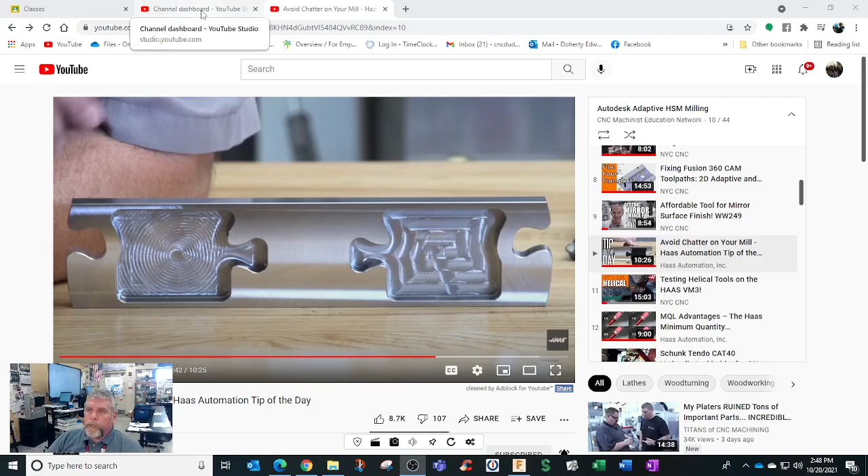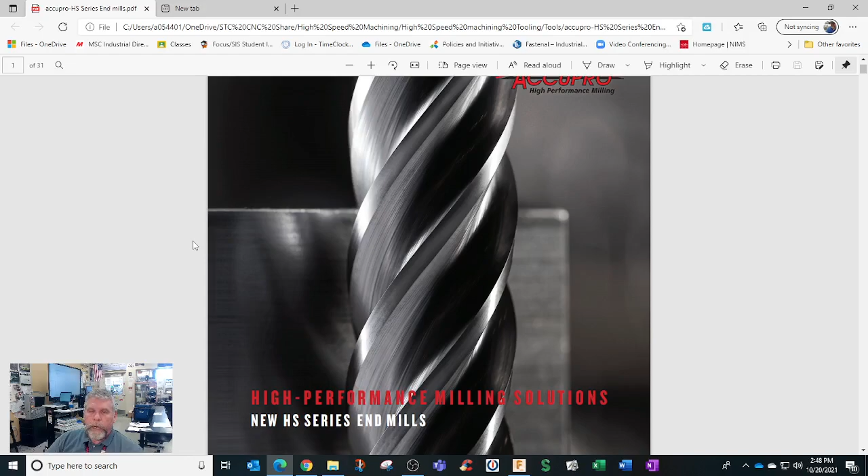All right, so what are some other things I have here? I'm not promoting any particular end mill brand. They all make pretty good end mills: AccuPro, Helical, Kennametal, Zombie Mill, all that stuff. So this is from our supplier, AccuPro. I saw this HS series, so I had to do some homework when we got into milling steels. We took some projects like Titan projects and converted them to steel cutting, and we also did some pre-programming for other metals, even though we may not have that metal.

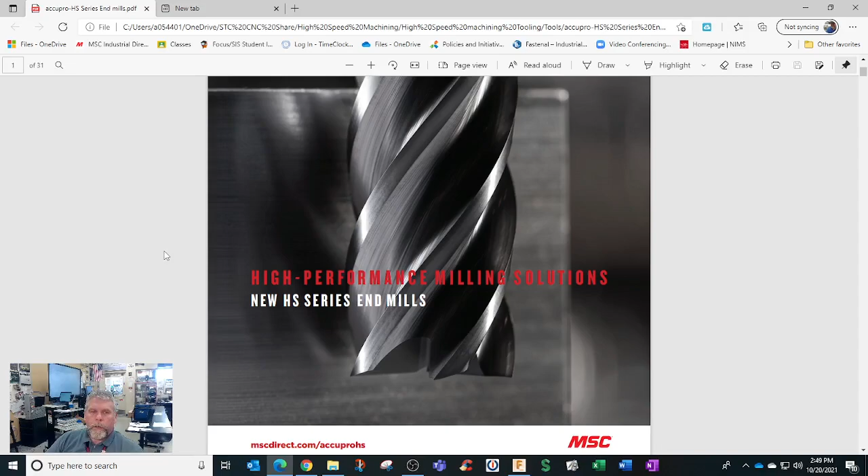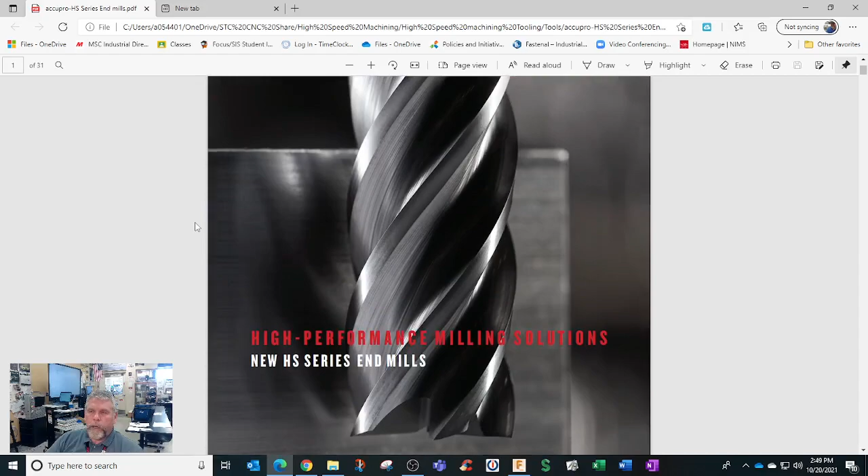And what kind of tools do we use? We have to make a little bit of adjustment on tools. The face mill that we use in our shop, the insert is capable of cutting different metals, so we leave that alone. For the end mills, we've decided to go to a 4 or 5 flute variable helix end mill. That's the style of end mill that's used for high speed or high efficiency machining processes.

A couple of things you really need: the tool is trying to yank itself out. We're trying to cut at full depth, so you've got to have a lot of grip. You can use a side lock, really a standard holder. If the end mill has flats on it, that's effective. The typical ER collet, if it's not torqued correctly, may not work. The end mill still may pull out.

They make some milling chucks that actually have a lot more clamping force. In our case, we're using a Lyndex SK16 collet system, and they recommend a torque wrench, so we have a torque wrench for that. We also bought some better caps for our ER32 system. We're torquing those also, and we've been really successful with those. You can see some videos on really high speed, like running 100 to 200 inches a minute in your steels. So we took some data here and experimented with some.

But we wanted to get the right tools. We got this HS series, and my thought was 3 flute tools are usually your aluminum tools, a lot of space. It could be uncoated or a coating that's agreeable with aluminum. But more flutes make the core stronger. 4, 5, and even 7 flutes are actually pretty effective. But how do you get them to rough? Like this is a 7 fluter here.

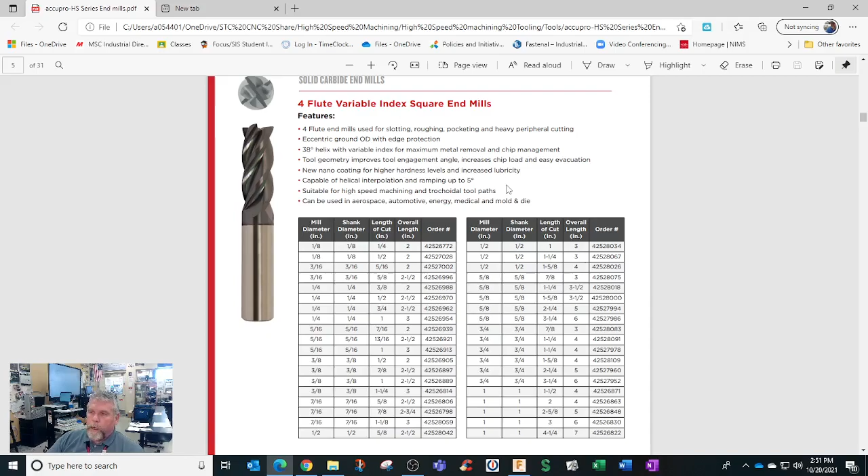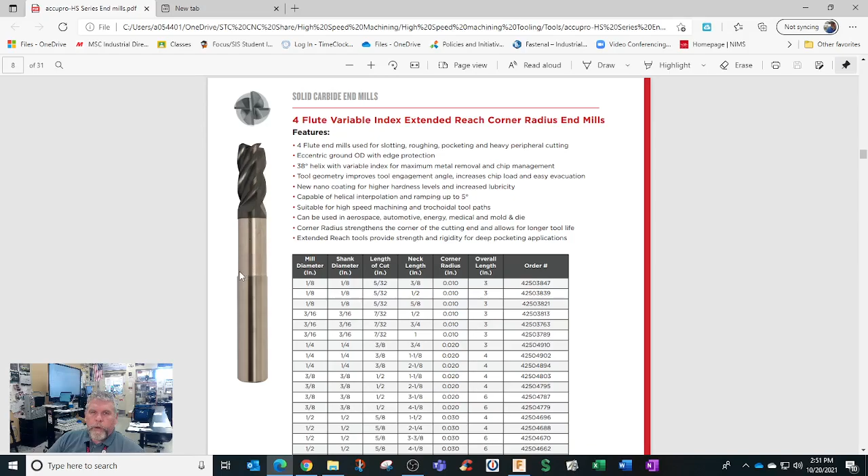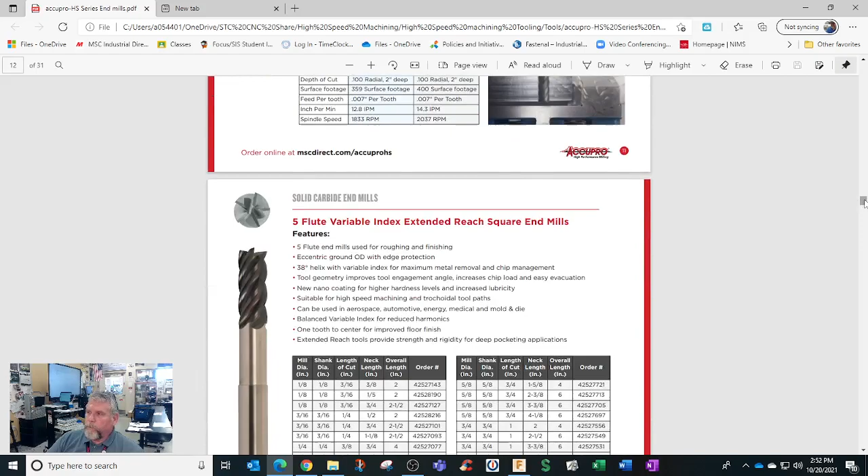You get your typical ball end mill, a corner radius or bull end mill, ones with necks on them, they're reduced. We used to have to make these; you go to our grinder and grind a neck on there. This one's for chip breaking with little notches in it. And your typical finishing flat bottom end mill. So at the very bottom of this catalog, you should be up to date on your feeds and speeds.

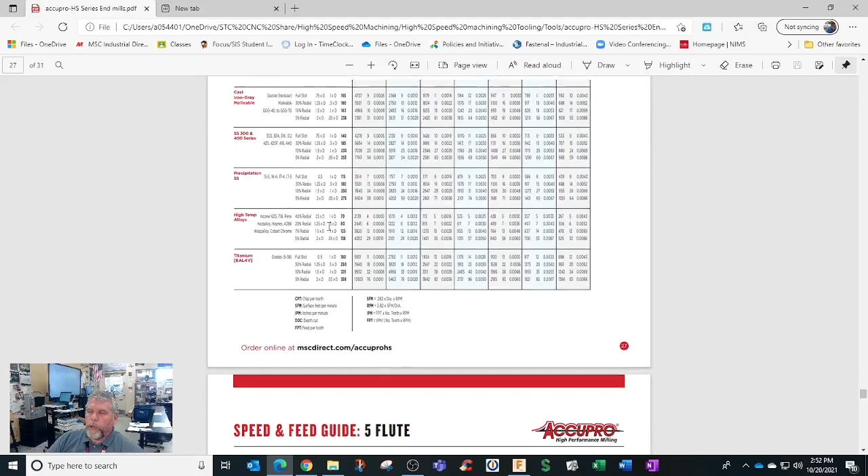Typically we're using a standard feed and speed chart, but we actually learned a lot on this, because if we use the 4 flute version on Titan 1M, where we're using a 3/8 end mill, and we're doing 1018 carbon steel right here, are we going to be full slotting, 30% radial, 10% or 5%? On the left here is surface feet per minute. This range is a little bit more expanded than normal, and you can get the reasons why later on.

But right over here, they actually gave you hard RPMs. Usually we're calculating. So we'll probably go with 30% or less on the radial. But they say this looks like it can do it. And if you have a low horsepower machine, the less radial cut will actually still work. So if you did 10% radial, that'd probably be pretty safe.

And then they have some recommendations. Axial depth of cut is how deep we're going. So in this case, if we're 30%, we can go 1.25 diameter deep. So with a 3/8 diameter, we can go 1/2 inch deep. So in this case, 1.5 diameter would be probably a safer bet.

We can go 10 or 15% on the radial, or the optimal load in Fusion 360. And radial depth of cut is really 10% of the diameter. That's what they're implying. So in this case, we would run this RPM right there, 3,496 at 40 inches a minute for steel. And then you get into your other metals.

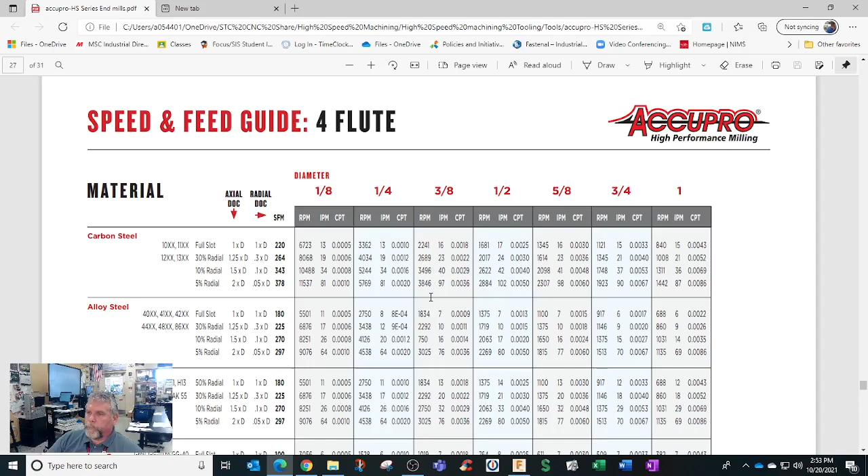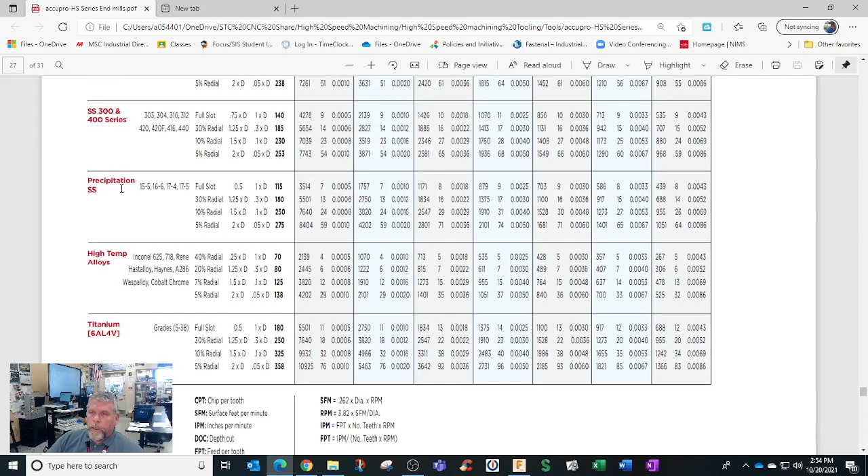You got alloys with the 4000 series, tool steels that are not hardened, cast irons, stainlesses, very difficult metals to machine. These are 2 stainless series. Then you get into your high temp nickel alloy stuff, Inconel, Hastelloy, Waspaloy, cobalt chrome.

I have a cobalt chrome knee, so it's part cobalt chrome and part titanium.

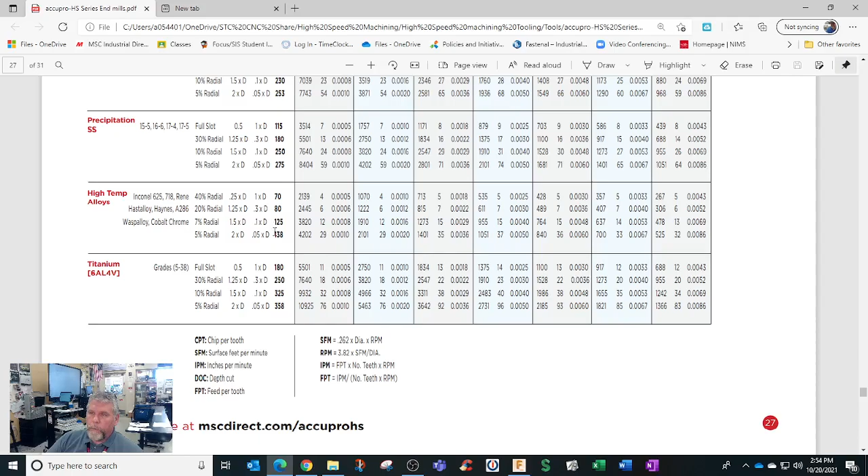And titanium. So actually the high temp alloys are the slowest RPM of all these. So if you look at the SFM numbers, that relates directly to RPM. Chip per tooth is how much each tooth can cut, and that's always in thousandths, small numbers. Surface feet per minute is how you calculate RPM.

So if your tool manufacturer says, I want you to run it at 200 to 400 surface feet per minute, that's your range. And you do a simple calculation to create RPM. In a milling machine, you got to have RPM, revolutions per minute, and it has to feed in inches per minute. So it is a terminology, and you even have the formula right here. RPM equals 3.82 times the surface feet per minute divided by diameter. So that's actually how it's calculated.

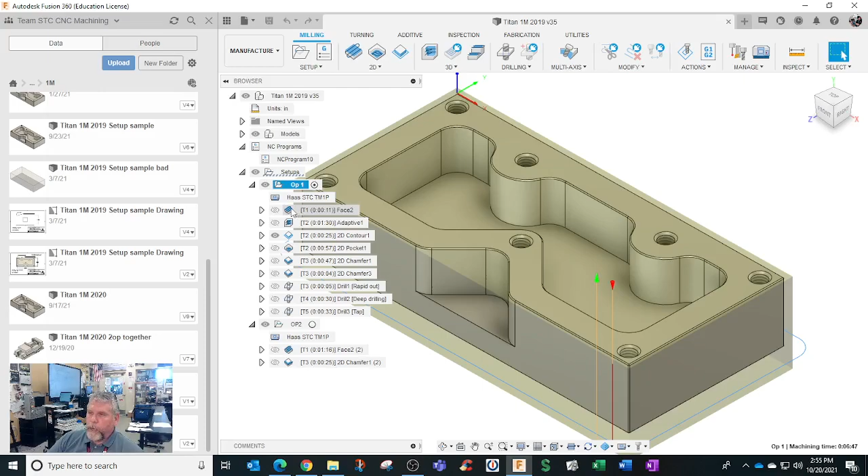Now, if you're in Fusion, it's self-calculating. All these CAD/CAM systems do that. I'll pull up a Mastercam one to do the same demo later. So in this one, I actually made my own tool library because I plugged in all my feeds that I need according to that chart I use. And I've already made parts with it.

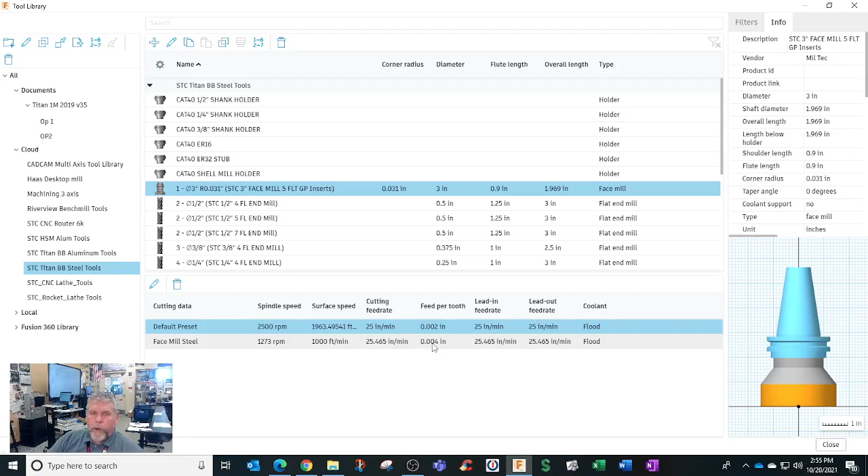So in my tool library, in my cloud, I have Titan building block steel. These have all been preset with the RPMs needed. So this one, we have tool cutting data down here, face mill steel. And that's 1,273 RPM at 25 inches a minute, which equates to 4 thousandths per tooth.

Now our Titan, if you use the 4 flute end mill, I have adaptive 10%. I have it all set up right here. So that would be my selection, which really is about 3,500 RPM at 40.5 inches a minute. And it's also going to set my optimal load at 10%. So it'll be like 0.0375 on the sideways cuts.

So I'm going to upgrade this one right here. I'm going to save as a new part. 21, oops, steel. And I like to say real machinists cut steel, so.

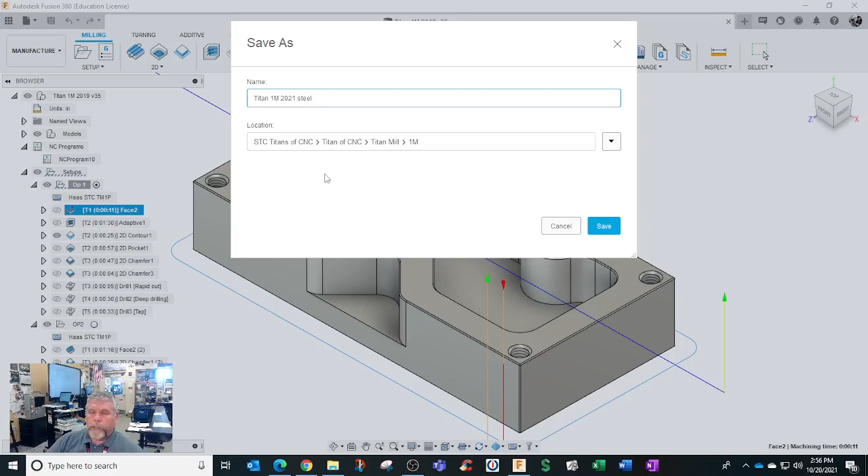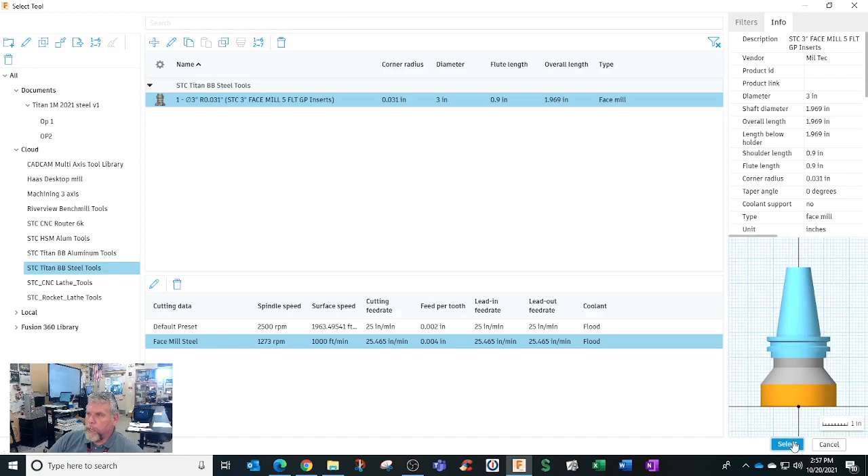Okay, we're gonna upgrade. Edit. And we're gonna select tools from the new library, steel tools. And here I can even just narrow everything down over here. Face mill, we only have one. Face mill steel. I've already pre-selected the RPMs. And other than that, I'm not going to change anything. Everything is ready to go.

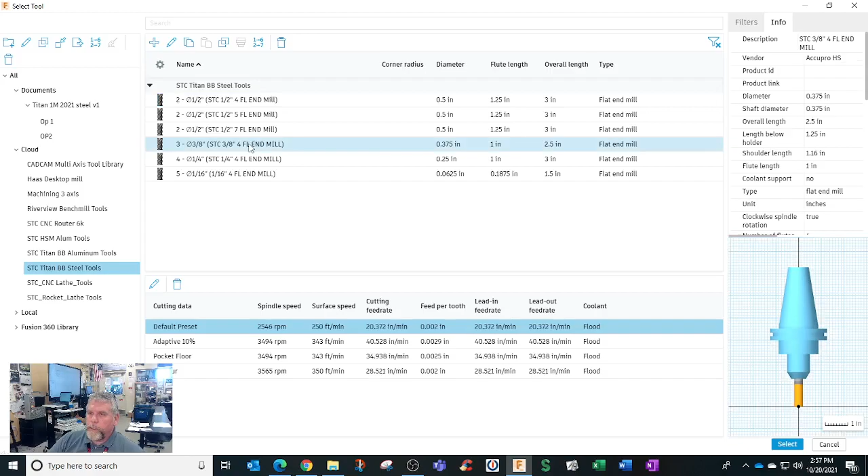All right, I got to go all the way down the list here. I got to go edit. I'm going to select the 3/8 tool, but I'm going to use the 4 fluter. So I'll do flat end mills. I'm going to use 4 flute. Oh, wrong selection. 4 flute by 3/8. I'm going to click adaptive 10% because that's the style of machining. And that presets all my feeds and speeds and also presets this optimal load number right here.

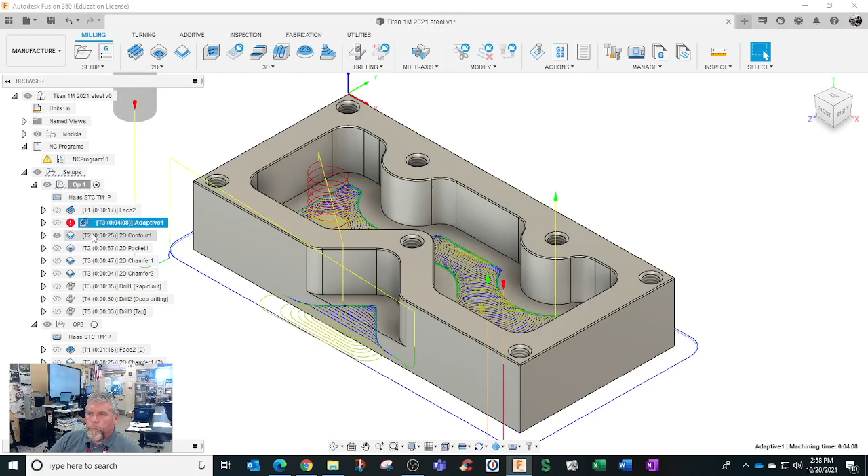But it's all the same parameters, stock to leave and stuff like that. All right. Now if I put the eyeball on, let it calculate, we should get an updated one. All right, yeah, there it is right there. You notice these cuts are very close together. That's the optimal load setting.

All right. So now we're going to go contouring. So then we just got to go update all the tools. Once you've already selected a tool in Fusion, you don't really need to go back to the cloud. You just go to your operation, because now we're actually getting different tools in here.

So if I go to operation 1, I got the 3/8 end mill, and I have the old one. I have 4 flute and 3 flute. This is the one I want. And this is going to be my contour. So I'm going to reselect that one and hit OK. And I have 2D pocket. And that one is also the 3/8 tool.

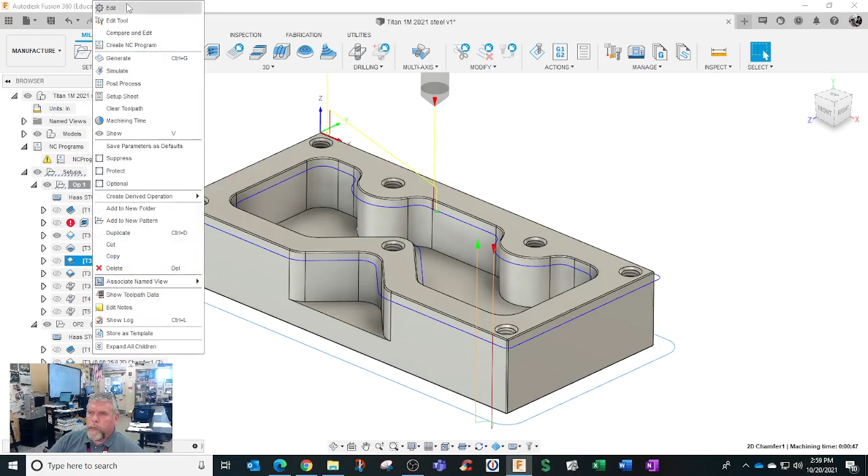So I've got to go reselect the tool, go to my operation 1, select the 4 fluter, and that's pocket, floor, select. Done. Hit OK. 2D chamfer mill. Let's go to edit, select. This one I'm going to have to go to the steel library, pick the, was it 1/4 inch chamfer mill, I think, and select chamfer, select, OK, edit, and yep. I've got to just select the new one, operation 1.

I have 2 competing tools, and I probably should relabel these. I've got Chamfer Mill 6000 and Chamfer Mill 53. So this is a case where I need to label this better. I'm going to pick chamfer on this one for the updated feeds and speeds for the 1018 steel. Hit OK. And I have drills.

Now the drill, so we're going to use the same chamfering mill. Change the end mill, and we're going to use a different drill and a different tap. The aluminum parts are using a forming tap, or what they call a roll tap. Sometimes we're not successful with using roll taps in steels, so we're going to use a proven formula. We're going to use traditional cutting taps. We're going to use a screw, or what we call a spiral fluted tap, so we'll pull the chips out because they're blind holes, and that requires us to use a different drill size.

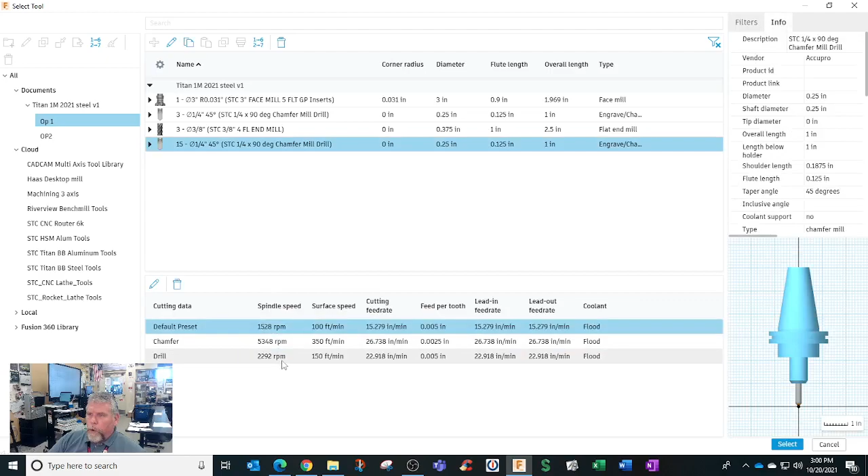So let's go reselect the spotting drill, which is the chamfer mill drill. I'm going to go to operation 1, and by default Fusion tries to pick hole making tools for holes, but we're actually reusing a milling tool, and we're going to pick the lower RPM drill feature for speeds and feeds. And another trick here is, yeah, everything's all set to go, chamfer diameter. Now we're going to change our drill and tap and change the feeds and speeds for that one.

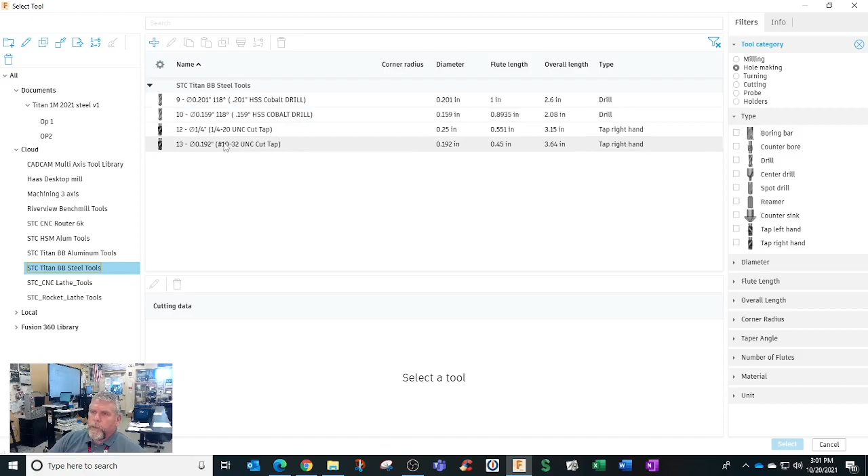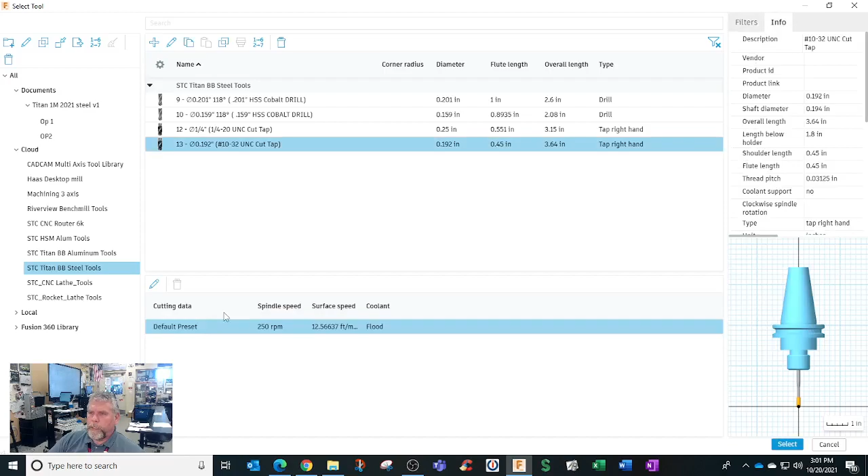Let's select that one, go to steel tools, we're in hole making, and right here we're doing a 10-32 tap, which requires a .159 drill, not the .177 that we normally use for the forming tap. Let's select that one, hit OK, and then drill and tap, final, edit, select, and steel tools, and we're going to pick the 10-32 cut tap. And this has a 250 RPM. And yep, hit OK. That's the correct feeds and speeds. So let me just do a quick regeneration. All right, make sure everything's updated. And we'll do a quick simulation.

So feeds and speeds are a very deep subject, but you want to take this a little bit at a time. So if you mastered the aluminum parts, now where do we go from here? Let's try various steels. 1018 is actually considered to be a low carbon steel. It's probably one of the softer steels, but definitely different feeds and speeds. So real men cut steel.

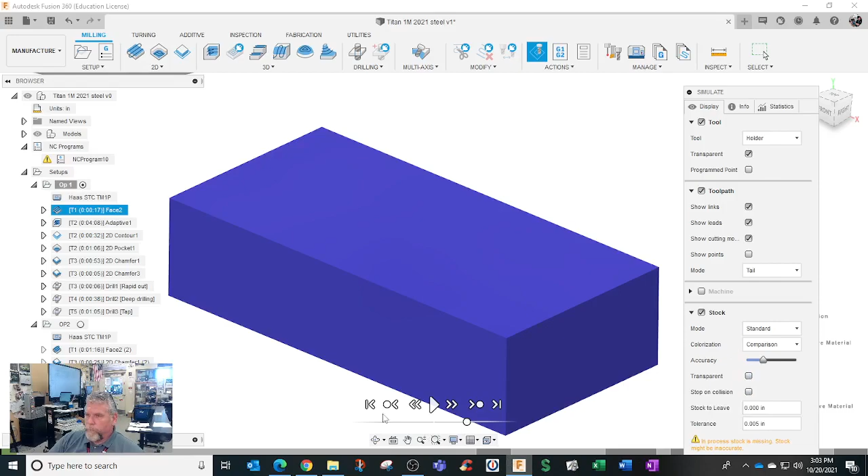Let's renumber the tools. So we're on operation 1. Going to renumber the tools and put them in order of operation numbers, and it'll line up with our tool list. Yep, that's done. And I'm going to do a quick simulate just to make sure everything still looks good. All right, I'm going to turn this new machine simulation off, and I use the comparison view because blue is big, red is bad, red is dead, and green is good. All right, slow it down and hit play. All right, green is good.

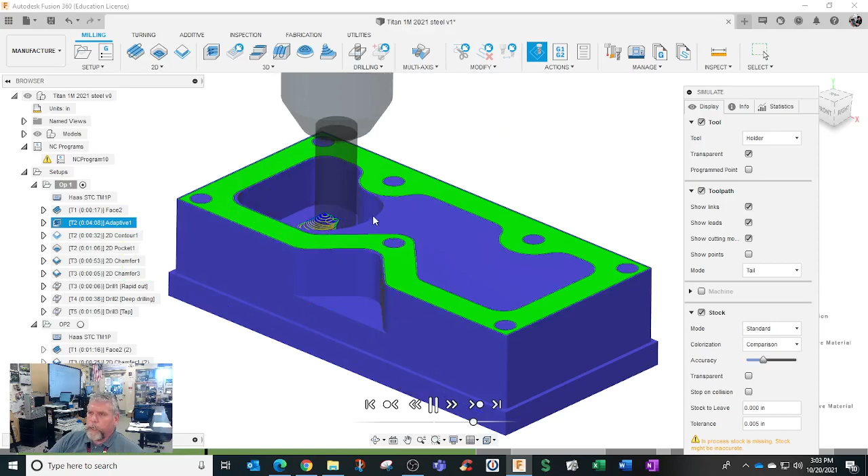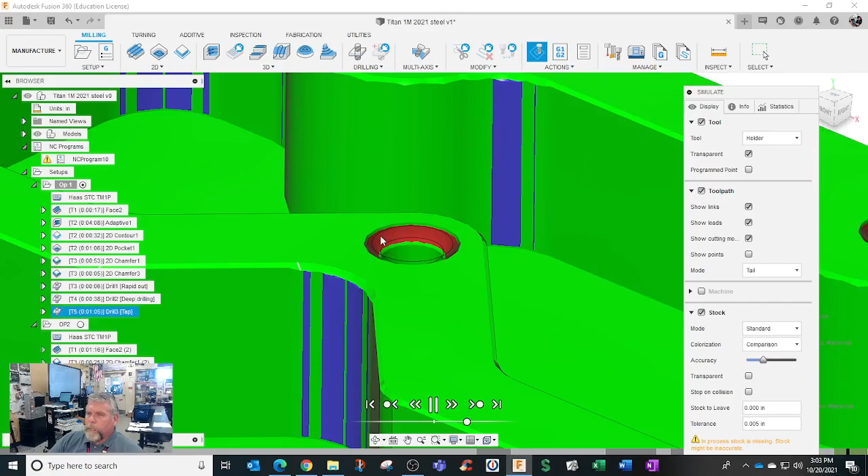All right, doing a roughing strategy just like we have before. Not much to see on the outside. Only take smaller cuts sideways. That's pretty much the only difference here. All right, then let's slow it down for all the others. So our chamfering left a little red mark there, probably because we're going bigger than the diameter. Let me just make sure that's correct, and that would be the first drilling operation. So if I look at it, it actually looks bigger than the diameter.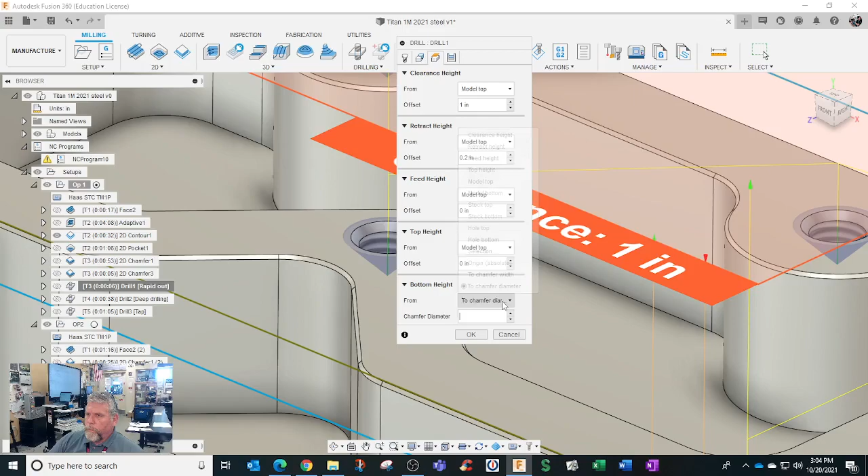So let's go see if we can do a quick fix here. What's our height? It says chamfer diameter, and it's forcing it to a certain number. So I'm going to just shut that off, and I'm going to go to chamfer width. And I found lately that's a better selection. That lines up with the hole size.

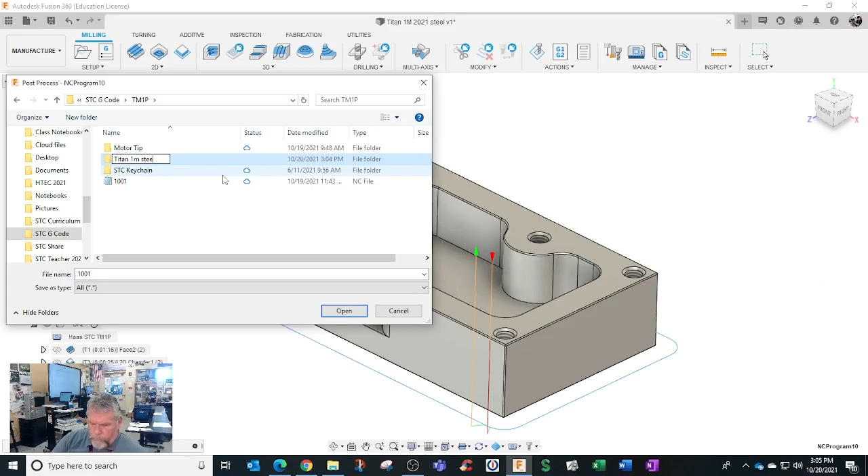All right, now we're going to post our code. Now in the new NC program setup, I see one here already, but if you press this, it says NC code out of date. So hopefully we can repost from this side. Hit post. I'm going to save it in my temporary file in the G code. I'm going to run it in the TM1, and I'm going to put it here under Titan 1M steel. So I have a place to put it. Hit save. Successfully posted, and review the G code.

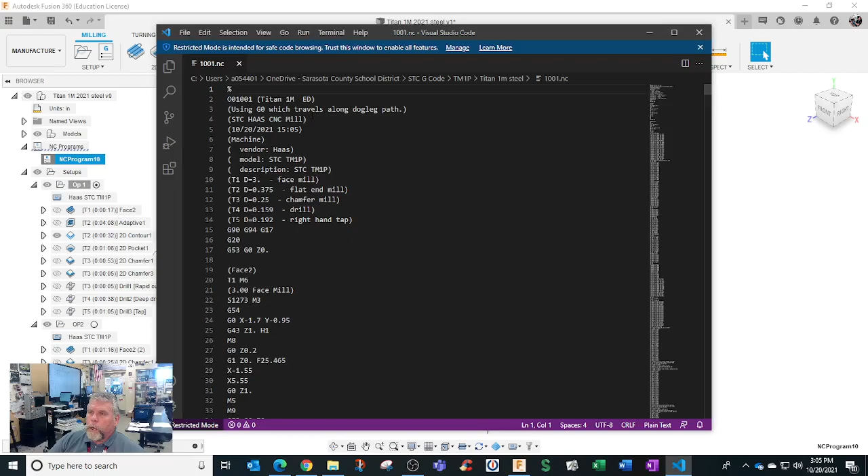So we did an update to use G0s for our rapid moves, real G0s. I've got the STC TM1P machine running, and all the tools are aligned. So we're ready to go cut steel. Same size material, 1018 steel, and we'll get back to you on how we did.